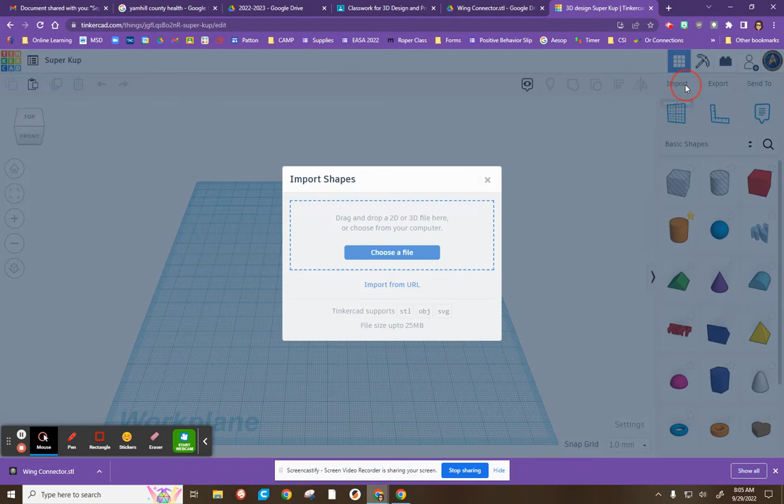Then when you go into Tinkercad, the first thing you're going to do is go over to the Import button, and you want to import that file. So you're going to choose a file. Yours is going to look a little different because yours is on your Chromebook, but you're going to go to your Downloads, click on Wing Connector, and open. Do not change any of the things in this box. Just click Import.

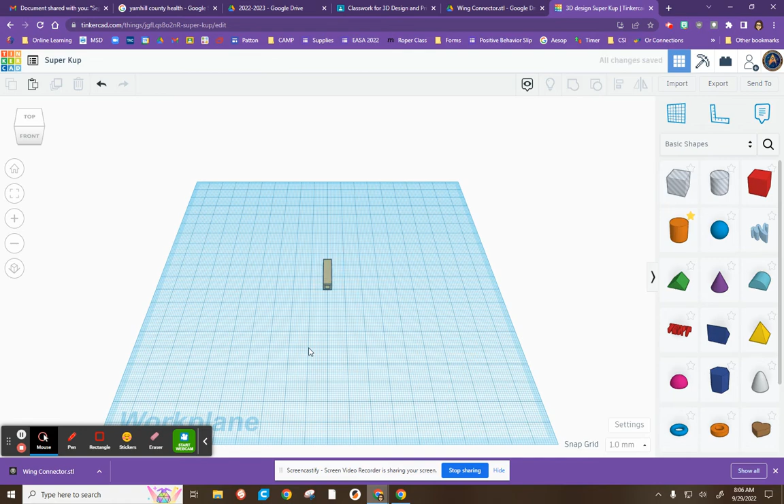And when it's done thinking, then here's your wing connector. Do not resize this. This is the perfect size for your airplane.

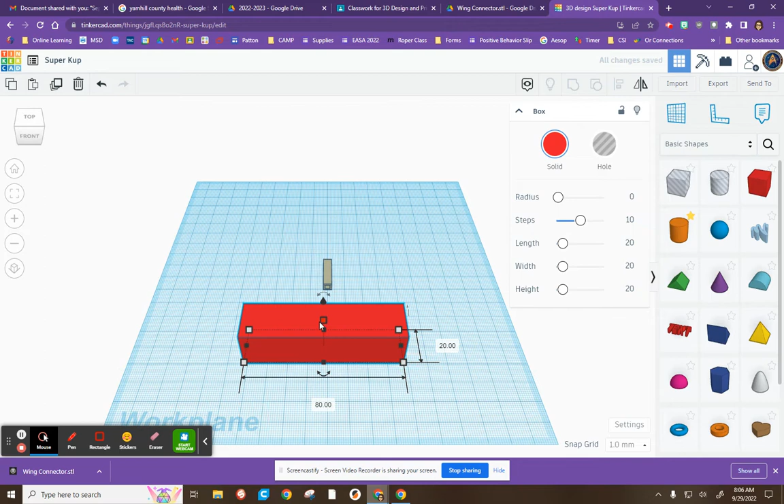All right, so now let's go ahead and make our wing. I'm just going to bring out and make a simple square rectangular wing. The instructions say it can't be bigger than 80 millimeters in any direction, and also it should be 1 millimeter tall. So I made it 80 millimeters in this direction, and I made it 1 millimeter tall.

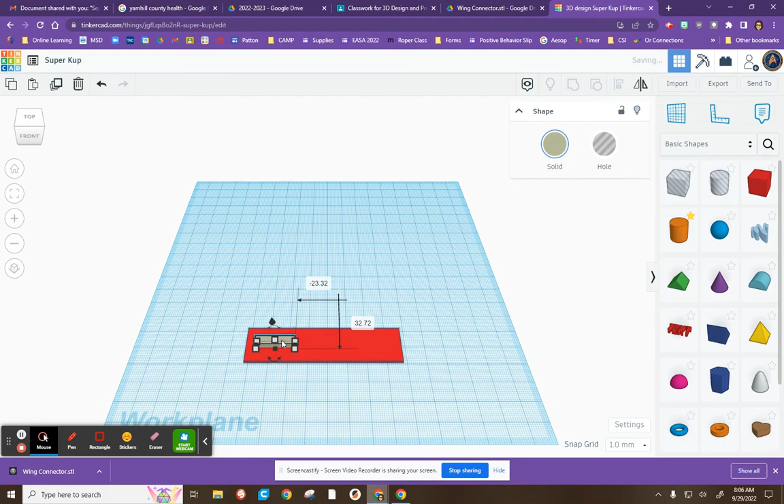If I'm going to put my connector on, I'm actually going to need to rotate this thing around, so I'm going to rotate it 90 degrees. Then I'm going to want it on my wing, so I'm going to stick it on my wing here. Now I need it to be up above the wing, so it's just touching the wing. So I'm going to raise it up 1 millimeter. So there's 1 millimeter right there.

Now we need to align this. We need to put the wing connector on the edge of the wing, and we need to center it. Now, if your wing design does not have it centered in the wing, that's fine, but it must be on the edge of the wing, or it will not fit on your glider.

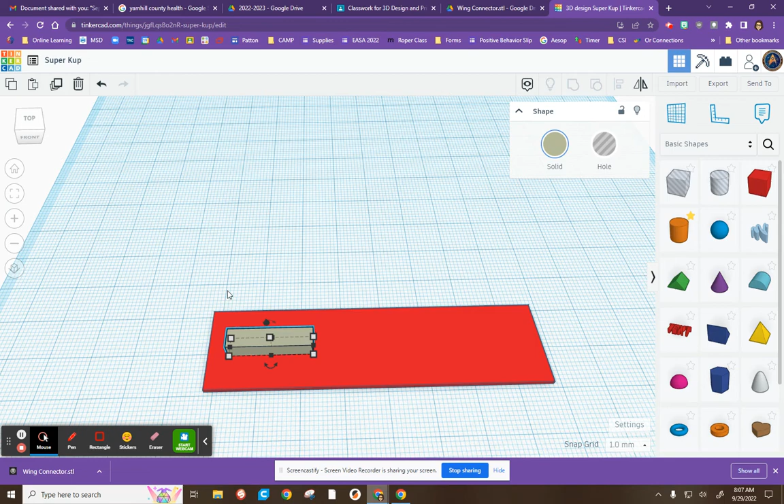So I'm going to select them both, use my Align tool. I'm going to center it. Then I'm also going to bring it to the front. So now I have it there. I'm going to group them. Good, there's my first wing.

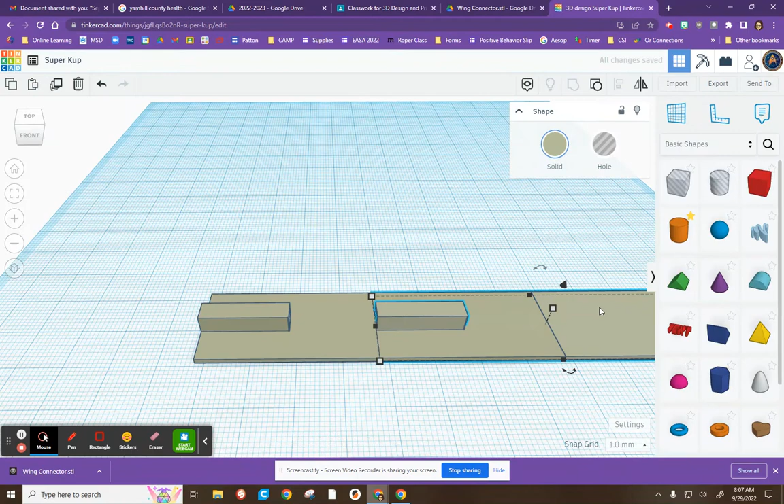Now, if I have the same design for my second wing, all I have to do is copy and paste. Boom, I have 2 wings. Now, if your wing has, say, a slant on it, so it's direction depending on which side of the airplane it's on, you can also use the mirror tool to make it for the other side of the airplane.

So once you're done, then you're going to label it your name, wing final, and you're going to mark it as done in Google Classroom, and then you'll get your wings to print out and fly.